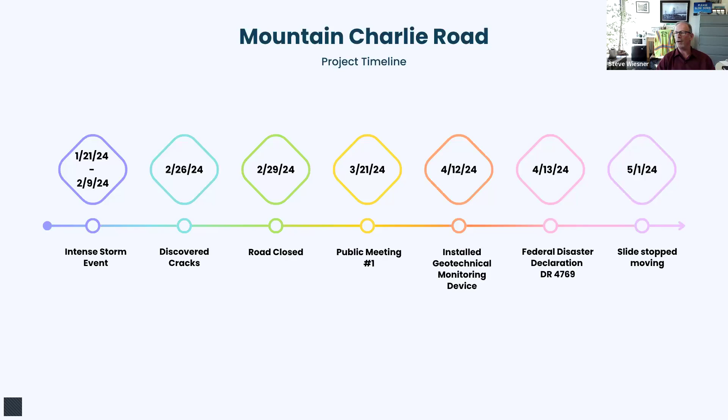We noted in our data that it wasn't moving anymore. And we were already starting to draft plans for what either a permanent repair might look like, what the ultimate alignment and geometry of that might look like, and what type of wall we might even use to repair it. And then in the ensuing months, we were working with FEMA to scope out the project, and again, both temporary and permanent.

And then by late June, we had our second public meeting. And I think there I really updated the community on where we were at with the funding. There were still a lot of questions in our mind. We still hadn't identified any funding for a temporary repair. And with FEMA, we were still even questioning whether they were going to allow us to enter this project into their disaster assessment inventory.

But by June, July, we were talking more seriously about a temporary repair, and Supervisor McPherson at the time had identified some Measure D funds in his district that we could use to possibly implement a temporary repair. And I know there's a lot of pressure from the community not having this road open. There's a lot of worry about fire and about emergency ingress and egress and all these types of things.

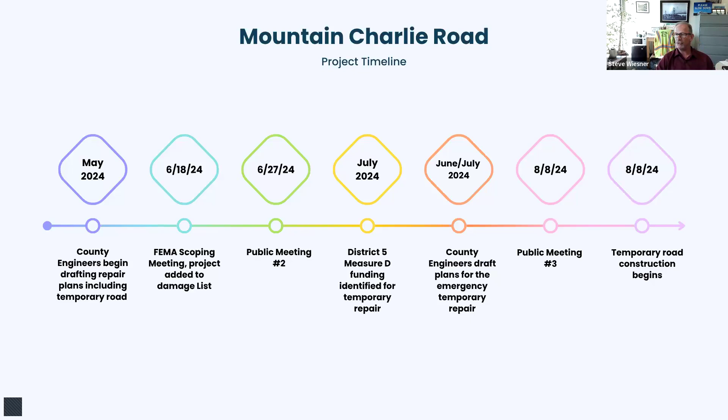We were listening to you guys, and we held another public meeting in August to let y'all know that we did identify Measure D funding to implement a temporary repair. We had a pretty good design going. We had a contractor on board who was willing and able to do the project. And in early August, that temporary road construction began. And we worked really, really hard for the next 6 to 8 weeks to actually implement that temporary repair. I'll talk a little bit more about that.

And then I think we were pretty happy to report that towards the end of October, when we had our public meeting number 4, that we had actually implemented the repair and the road was going to be back open. And there's been a lot that has occurred between last October and this June, over the last 8 months. And so that's why we're here today to talk about sort of what's next.

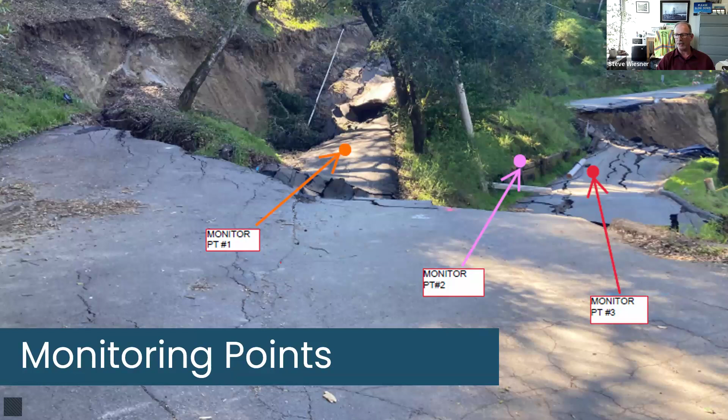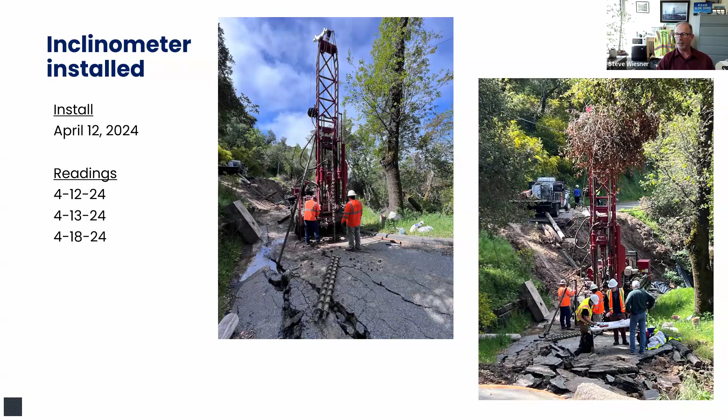And then we had hired a geotechnical firm in April to go out there and start to install some instrumentation. Specifically, an inclinometer was installed so we could measure ground movement both at the surface and subsurface. And we got a lot of really good data from that before the slide stopped moving, and it really informed us as to what's going on there. And then we had done some preliminary layouts of what we thought the ultimate geometry would look like, taking into account that that driveway had to get rebuilt as well.

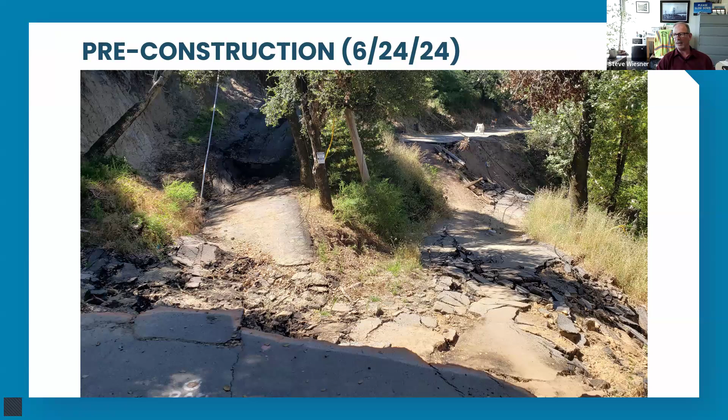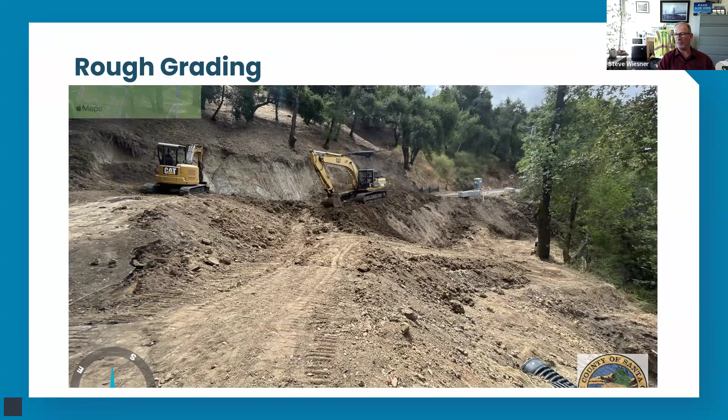And this is prior to us doing any kind of work out there, but this is what it looked like when it came to rest. And then by the time we started working in August, you could really see we were clearing the area out. We had to move that pole there in the middle. There were several utilities that had to get out of the way for us. And then we processed all that material. We brought in a lot of good material to process with what was not so great material to build a fill out of, but we did it.

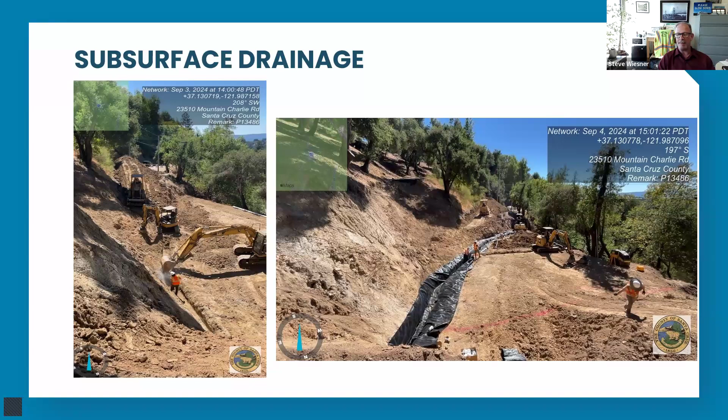We installed quite a bit of drainage, and I'll have to say, we did have some rain up there this year. It wasn't one of our worst winters, maybe not even average when it came to numbers, but we did have some big gully washers where we got 2 to 4 to 5 inches in an evening, and that's the type of rain that's going to test a temporary road like this.

So it's a good thing we put in all those drain blankets in that manifold system, and we got the water out to the outside of the slope. And then we obviously installed some cross culverts as well.

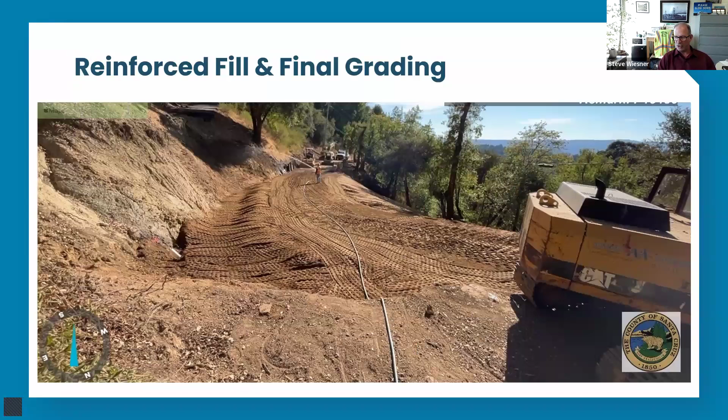This is what it was looking like right before we brought it up to grade, and this is what it looked like pretty much the day that we opened it. We did note there was probably still going to be some work to adjust, but for the most part I think we had good construction from our contractor to get the road back up to what it looks like today.

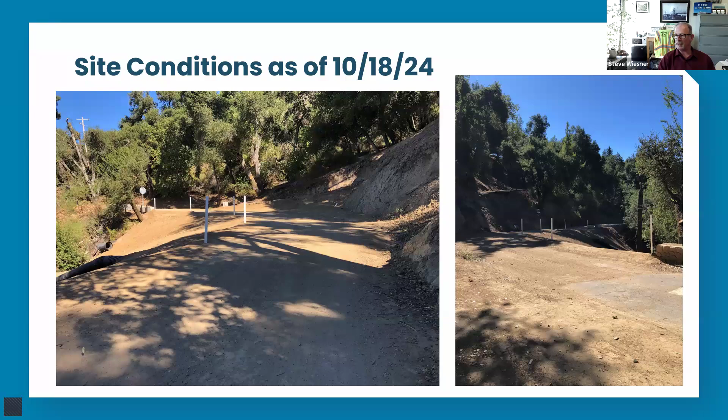But then as we started getting rain, which we did in November, I think that was our first rain, we saw a lot of mud sloughing off and it was clogging up that drain. We were very worried about water actually going over the other outboard side of the road, so the crews went up there and installed this pipe.

This is a great down drain system that they installed. They also welded some angle iron onto the grate at the drainage inlet to lift it up so it could allow a certain amount of debris to get through without just clogging up. That really helped out a lot.

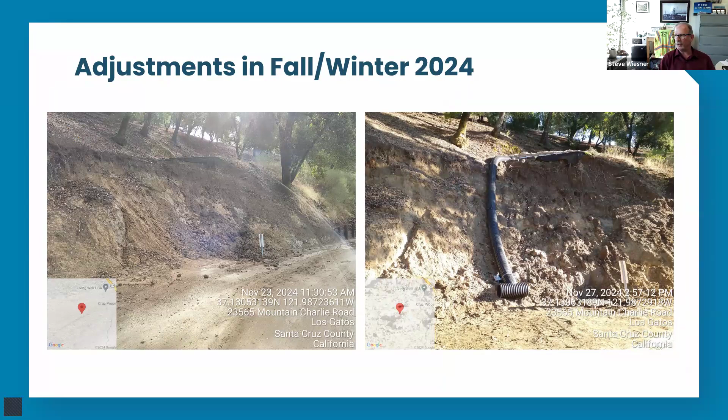They also put in that berm, you can see in the left-hand picture, that dirt berm the crew built. I think that was a really good thing for them to do, just in case water did get to the edge of the outboard side of the road, it wouldn't cause any erosion down through the fill. So I think that was really good.

You can see we were already getting a little bit of rain, and even into December we were starting to get some rain.

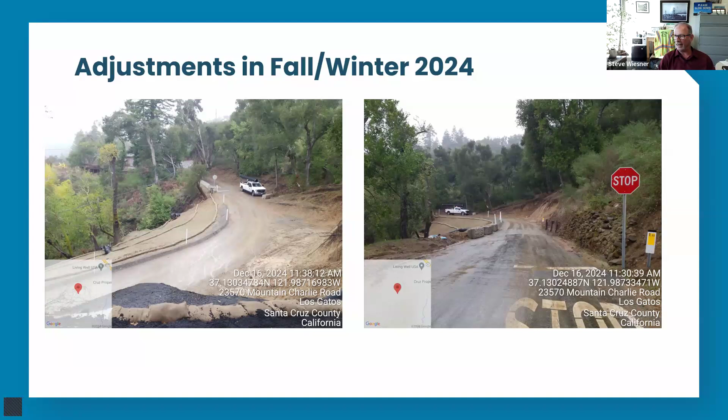I would have to say we sent the crew up there every time. After every rain the crew was up there, and even during the rains, to monitor the site and make sure we weren't getting any movement that we didn't want to see. And we didn't, we actually didn't.

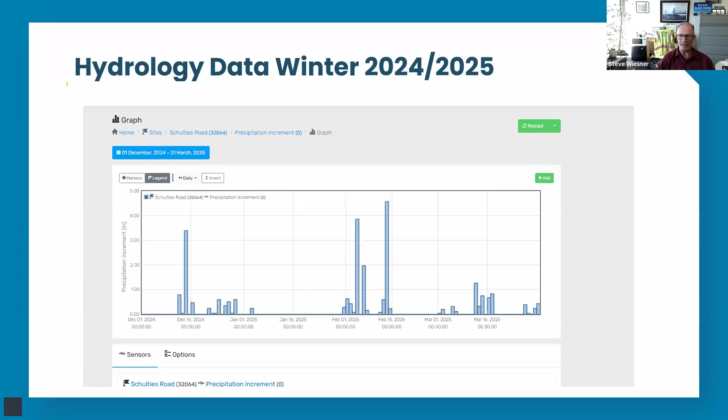They did a little bit of adjusting through the winter, but for the most part I think the road performed really well. Some of you will note there were some chuck holes and potholes forming in the base rock, and we anticipated that was going to happen. We were trying not to go out there and repair it every single time because we knew it would just continue to happen, but it stayed serviceable.

As for the status of the current temporary repairs, there's really no signs of settlement. We've inspected it thoroughly, both on the inboard side of the road and the outboard side of the fill. The inboard side looks really good; we almost see no movement at all.

We do note there's a seep, a spring at the northern end. That's likely one of the main drivers of the original slide, and we know the water's coming through, it's coming above the road. It's really mushy in that one spot on the northern side. We're monitoring it, we know it's there, and we're thinking about that and what we might do with the permanent design to try to wick that water away even more than the under drains we put in as part of the temporary repair.

But there's very little sign of erosion or rilling on the slope, which was really good to see. And we are getting water and production out of the under drains, so we know they're working really well.

We do have some signs of the slope pulling away at the steepest area where it conforms back into the regular Mountain Charlie road fill. It's on the outboard side of the southern side, a little bit of cracking. We're watching it, we don't think it's going to cause anything catastrophic.

It's really gravity just pulling it down, and it really calls out the need for a permanent retaining wall in this area. We know that's what the permanent solution is going to eventually be, but we're monitoring it. We actually just discovered a sinkhole in one of the new culverts we put in on the north side, so some of you driving by may have noted we put a barricade on it recently. It's something we noted, we're watching it, and we're working with the contractor who installed that to make the repair. That's something we'll do this summer. Just to alleviate any concerns, we've noticed that and we're looking at it.

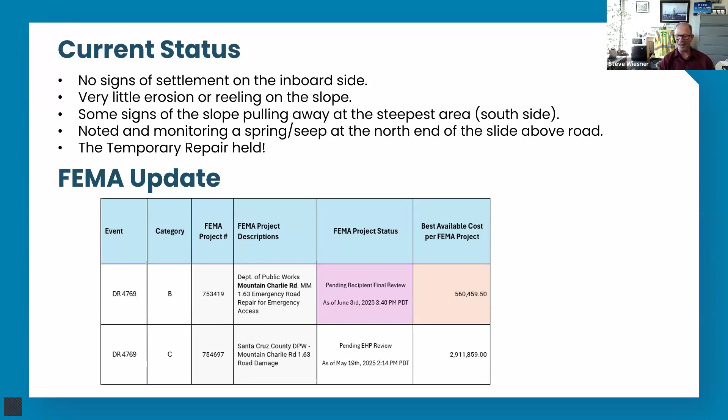So I don't want anybody to get too excited that we're going to see a permanent repair out this summer. This is not going to happen this summer. But that said, we have a really good start on the design for the permanent repair. It hasn't changed much from when we originally showed the alignment to you and what the concept was for a soldier pile style wall, retaining structure. At that point, we'd be able to move the road back into the county road right of way. We're obviously talking with the folks who live up at the top of the driveway that got destroyed by the slide as well, trying to do everything we can to coordinate their repair ideas with the county's repair and our timeline and the FEMA approvals. So we're doing a delicate dance with both the community and with our federal and state partners. But I don't have any bad news to share, so I think I'm going to call that good news. No bad news is good news, I think sometimes. And that's where we're at with that.

So with that, I want to talk just a little bit about what we can look forward to this summer. The crew's definitely going to pay some attention to Mountain Charlie Road, and in fact, they already have. They were scheduled to do ditching throughout the entire district between April 25th and June 20th.

I think they've completed the ditching on Mountain Charlie Road, which is good, and I'm sure those of you who drive the road daily have seen that. What they're going to do next is they'll be up there in July implementing their pavement repair program throughout the entire northern area of our county, and in particular, they're going to spend a couple weeks on Mountain Charlie Road.

That's a really big commitment and a great investment from our road crew. They're going to get up there for almost two solid weeks, and they're going to patch and do as much pavement repair as the time allows them during that period from top to bottom. They're going to cover the entire road.

And then in August is when our mowing program starts in District 5. So be patient, but they're going to get out there and do as much vegetation control on the roadside as they can, including on Mountain Charlie Road and many other roads throughout their district as well.

With that, I wanted to share that because we didn't spend the full $700,000, we were saving it to see if there were any big adjustments we needed to make throughout the winter, and it appears we've made it through the winter fairly unscathed. We recommended to Supervisor Martinez to utilize that last $30,000 we have to resurface the road.